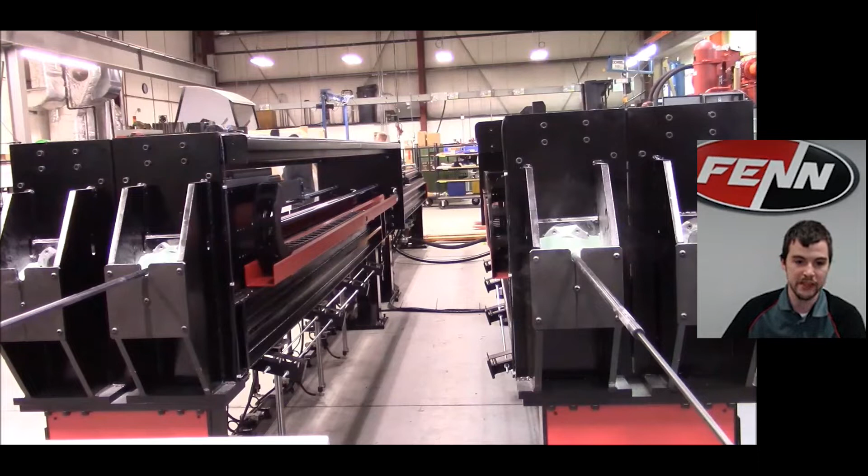What you see here is a video that I'm going to do a quick rundown on, to give you a background on an example of some types of drawbenches we've done in the past. This drawbench itself is a multi-draw drawbench, so it's a little more production oriented, running 4 tubes at once using a mandrel for controlling the ID.

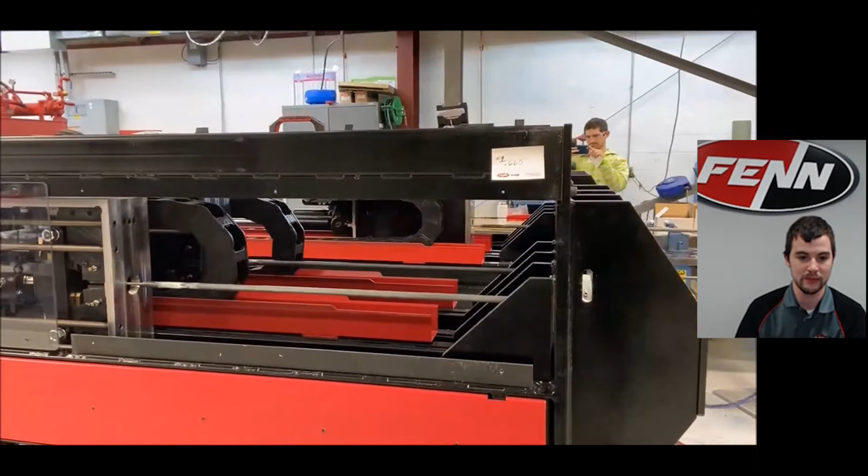We have support lifters that come up to support the material as it's drawn, and then self-release, as you see here on the sides. We'll show this from a few different angles, giving you a better view of the lifters as they come up to support the material. In this process, there's a decent amount of pull force needed, about 24,000 pounds.

We have a hydraulic gripper that clamps down on the material, self-actuates, drives it, and pulls it forward, then self-releases in order to pull it through the die using a cylinder in the back, and self-releases it at the end accordingly. That's just a quick rundown on an example of one type of drawbench we've provided in the past.

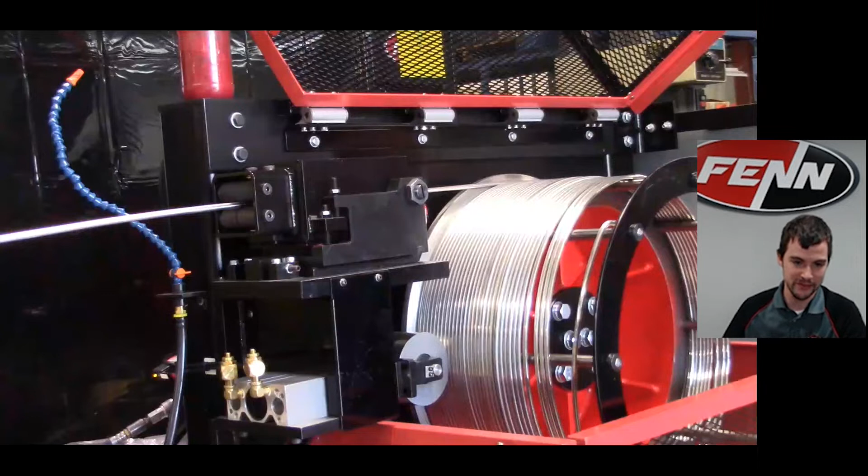This next video is a quick rundown to give you an example of a little more of a simple drawblock, just to show some examples of what we've done in the past. The primary difference, which we'll talk about more regarding drawbenches versus drawblocks, is short length versus much more continuous. Drawblocks themselves are used for running much more continuous length material for higher production purposes.

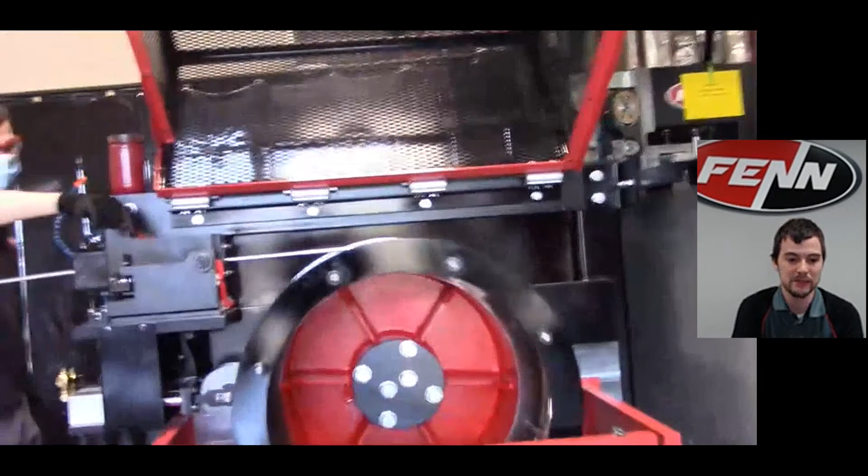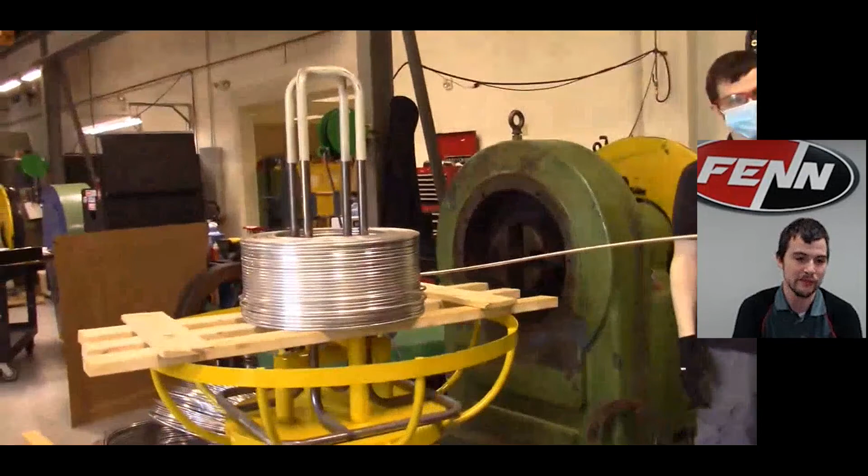This one is running relatively low pull forces, so we used a manual gripper initially for threading, and a pneumatic hold-down roll to apply grip and tension. This does run continuous lubrication, but in this video, when doing tests on the floor, I was manually applying a little of it. We're taking off a brake payoff and running around the drum. Depending on how much is needed to be collected, we will put them in line with other types of equipment, such as dancers and take-ups.

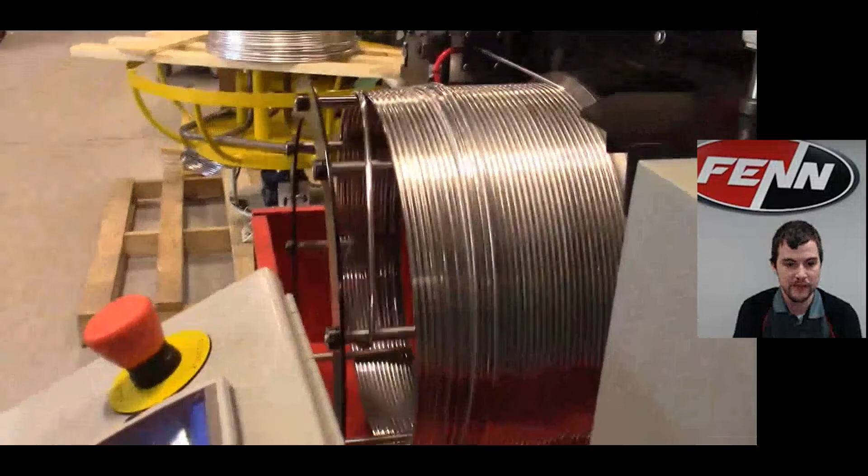In the case of this one, we were running on just a low enough coil quantity that we were running just extension bars for a loose coil shed and collection material, as you see here. Just as a little point of note, you can see a little bit in the bottom corner, a display screen on the control station.

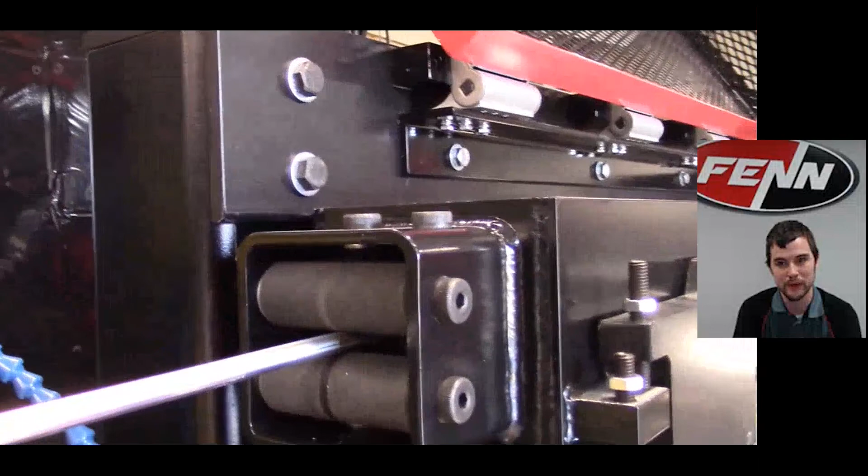That's a display monitoring of the force, because we actually have a load cell tucked into the die box for monitoring the force of the material being pulled through, both from a research standpoint as well as a safety net to protect and make sure the expected forces we're drawing at aren't far beyond that. Because if we see spikes in forces, that means we're getting increased resistance in the die, which we can then stop to protect the system before the material breaks.

So that's just to give you guys a couple quick rundowns of some types of drawing equipment in terms of both the bench and the drawblock side.

So when talking drawing in general, we pretty much work with almost any type of material you can name in almost any type of application. This is just to give you guys a few examples.

So depending on what you're looking to do, we can pretty much accommodate your needs on the material side. This is just to give you some general rundown.

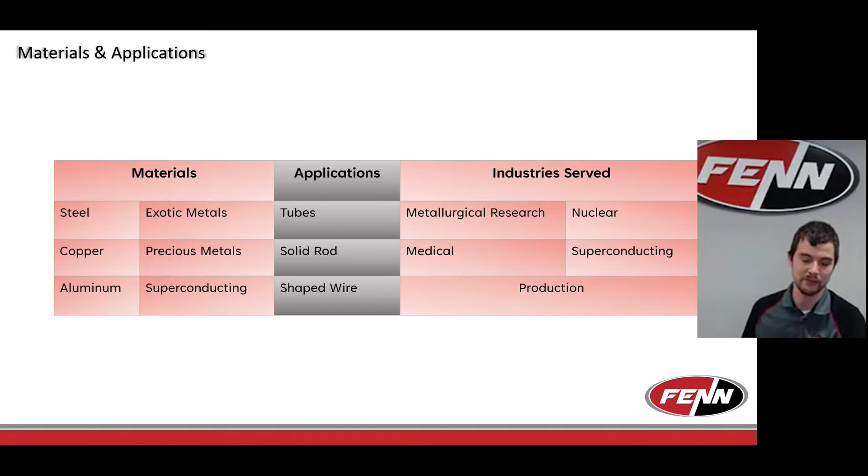So as I mentioned at the beginning, one of the things I was going to talk about is basically what dictates whether you want to go for a rod mill versus a drawbench or a drawblock. The biggest advantage of a rod mill is that you don't need any draw dies.

So if you're using a drawbench or a drawblock, you need a draw die, which means you need to point the material prior to threading it through the die and doing your remaining reduction, which naturally generates scrap. So there's less overall scrap and no pointing required when it comes to a rod mill. Those are the big benefits of doing that on a rod mill.

But some disadvantage of the rod mill is because you're using a V-groove rolling pattern, whether to make your round, your diamond shape, or whatever you're doing in your tube and rod, because it's two rolls in contact, you have more natural flow into the cavities since it's two pieces coming together versus one solid fixed die. So in terms of sharpness on your corners, they're going to be a lot looser, and you sometimes might need to take what we call a two-step hit in order to actually get that concentricity.

So that's usually where the rod mills start to lose their advantages, and that's where the advantages of the drawbench and drawblocks come in. The drawbench and drawblocks are a lot easier for controlling shape and size because they can keep concentricity, or for shapes that aren't just circles, they can naturally get you a lot tighter corner radius for your benefits and needs.

And overall, that's why for a lot of applications you see drawbenches and drawblocks used, but there are a few in particular, depending on what the customer is looking to do, where rolling mills can be used quite effectively. And obviously the nature of a roll versus a draw die will also create a difference from a metallurgical standpoint in terms of work hardening and grain structure.

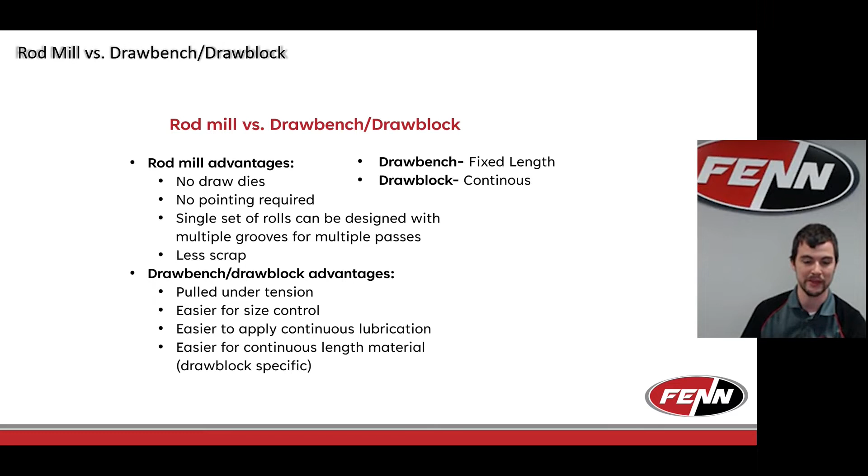It's pretty much what decides whether we go to a drawbench or a drawblock is the premise of fixed length versus continuous. Drawbenches are great for running short length material. Drawblocks are for higher production, or where you have the ability to run a full coil of material. That's when they come into play and are used, much more on the high production end or applications that allow you to run much larger volume at once.

As I mentioned, when it comes to drawbenches and drawblocks, you need to point. There are a few different types of pointing equipment, primarily roll pointers, push pointers, or swagers. We can provide any of those, but we specialize in making a lot of swaging equipment with various tooling, feeds, and features. So primarily, if we're requested to provide a pointing apparatus with one of our benches or drawblocks, we primarily provide swagers unless requested otherwise.

So for those of you also interested in pointing equipment to go with drawing equipment, you can speak to us on the swager front. We've had a separate webinar, and you can find a video rundown on that online.

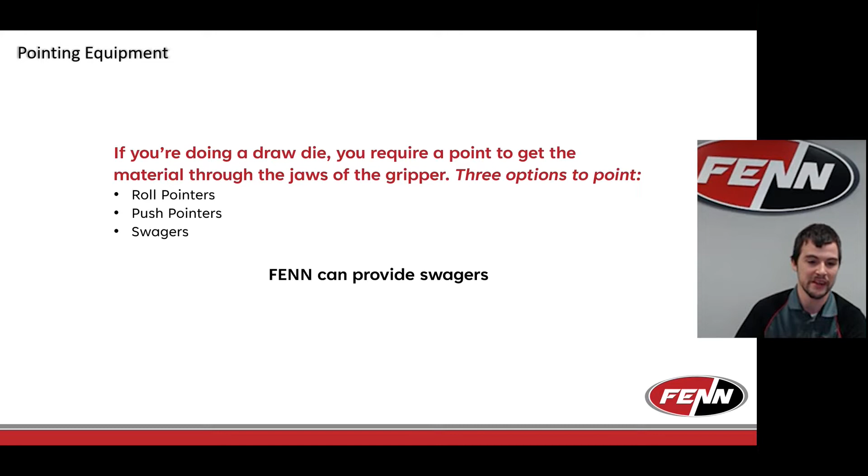So now I've talked about just generally surface level stuff on rod mills versus drawblocks and drawbenches. Now I'm going to give you some background on the rod mills.

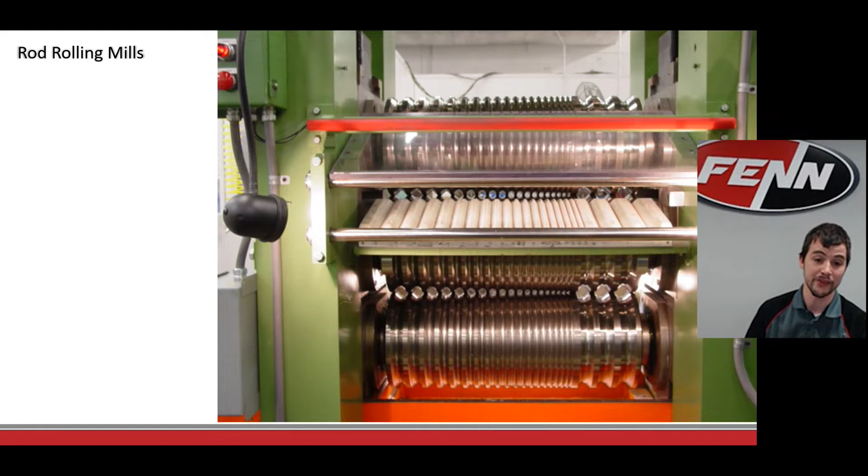The photo you see here is an example of one of the rod mills that we ran. This one was running a diamond shaped pattern in the profiling, and you can see we were running multi-stage hits through the rolls themselves in order to create the reductions over time for the schedule that this customer needed to reach their end application. This one has 3 rollers, which is the 3-high configuration, which we'll talk about on the next slide.

On rod mills, primarily, there are a few exceptions, but primarily when we're talking about rod mills, we're talking about 2-high and 3-high. The reason being, compared to strip and other applications, these are the two configurations that cover almost all, if not all, rod rolling applications for the most part. 2-high is the standard you see for the most part. Both configurations are used for hot and cold rolling.

But the primary benefit of 3-high comes into play if you're trying to get some level of production out of a rod mill, but you're running a fixed length material. With a 2-high mill, you can reverse it back and forth, or attach winding equipment if you have full coils of material to run at a higher production standpoint through a single groove slot and then rethread it through. But if you're running a single bar that you want to pass through and get the most efficiency out of, the 3-high mill by nature allows you to pass it up through the top rolls in one direction and then back through the bottom 2 rolls in the other direction, allowing you to continuously pass it back and forth without stopping and reversing the mill.

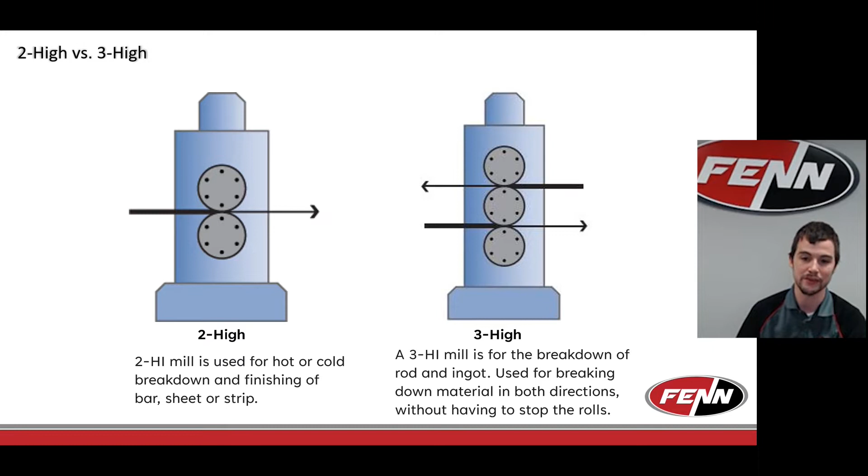Outside of the nature of the two configurations, when it comes to rod mills, primarily the things we look at are the rolls themselves and the frame size in terms of selection. Compared to strip mills, rod mills typically have a much larger roll diameter relative to the housing, because the contact surface is much narrower in overall width since we're dealing with round product that we're reducing. So we can take much heavier hits but need a larger roll to grip it, though it doesn't generate as large a load, so we can usually get away with a smaller bearing.

So when it comes to selecting the roll size, we're usually taking into account the area of reduction and the tensile in order to come up with how much load we're generating, as well as the overall reduction we're taking from the thickness and the sides from a standpoint of contact, and then selecting the roll diameter accordingly.

Basic rule of thumb when it comes to roll diameter is that the bigger the roll diameter, the shallower the angle of entry you have as you're reducing it, which makes it naturally easier for your roll to grip. But a bigger roll by nature needs more raw force to create the same pressure. The smaller you roll in terms of size of material, the more pressure you need naturally in order to get smaller and smaller, which makes it difficult for a bigger roll to produce that.

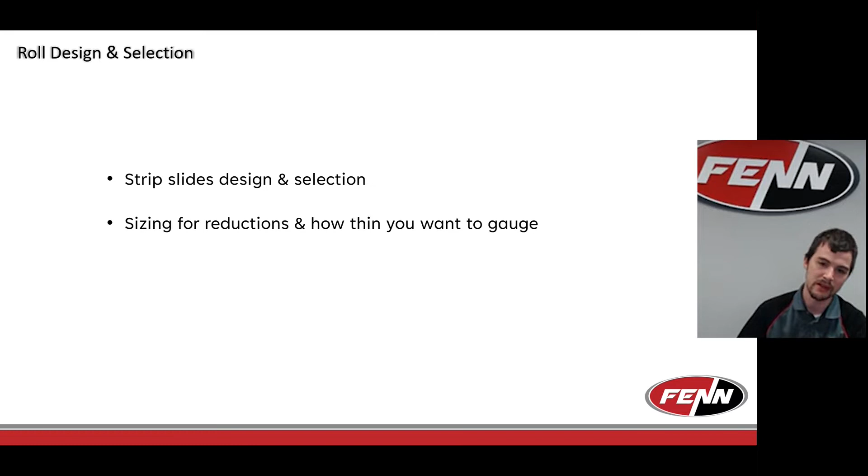So we're now going to talk a little bit more on the drawing side of the equation. For draw benches, we can cover quite a wide range of sizes. We've done benches for very low sizing, about 2-foot draws and 250-pound little pneumatic benches. And we've done benches with hydraulic grippers and chains that can do parts 230 feet long that generated 200,000 pounds, and pretty much everything in between. So when it comes to your drawing applications, we can cover a wide range.

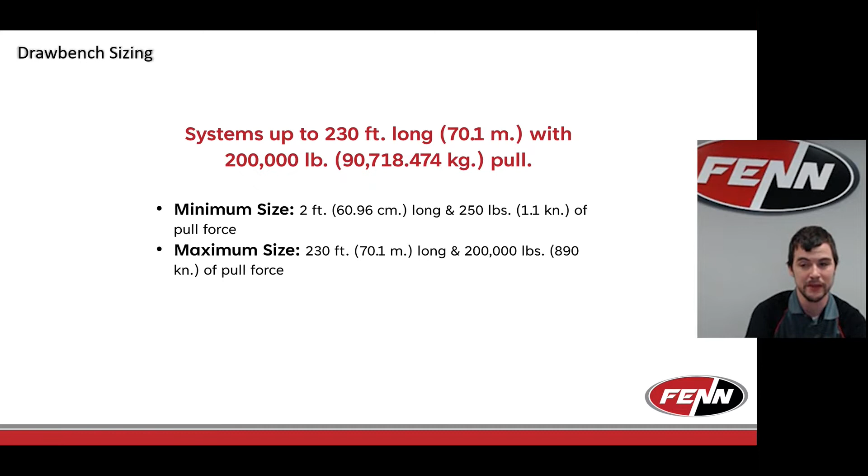And I'd be remiss to say that obviously we're a custom design house. So if you're looking to do something bigger than this, we're not necessarily afraid of doing that. We can definitely go bigger. This is just currently the biggest we've been asked to do upon request.

So when talking that range, there's basically three styles of drawbenches we deal with in terms of the premise of what is drawing it: hydraulic benches, ball screw, and chain. The usual rule of thumb I apply is that if the material is short enough in length that we're not worried about floor space, I primarily default to a hydraulic drawbench. The reason why is that the point that's gripping it and moving back and forth laterally to pull the material in a line is a cylinder directly in line with the material. So it's a perfect straight line draw.

You can control the pressure. It's great for controlling your tension. It's very simple, it's clean, and it's great to work with. The downside to a hydraulic drawbench is the overall footprint it takes is about double the length that a chain or a ball screw is going to take, because you need your draw length plus the length of the cylinder itself.

So if you have a 5-foot draw, you have a 5-foot draw area plus a 5-foot cylinder and the miscellaneous stuff around it, so you probably have more about a 12-foot space, which for a 5-foot draw is fine. If you have a 100-foot draw, you probably don't want to use a cylinder for that exact purpose.

You're going to be more likely using a ball screw or a chain. Ball screw and chain both work on the same basic premise: we have a motor and a gearbox driving either a chain or a ball screw that moves a carriage block up and down the track, which naturally pulls it. The ball screw or chain is underneath the carriage itself, and underneath the material from a point of draw.

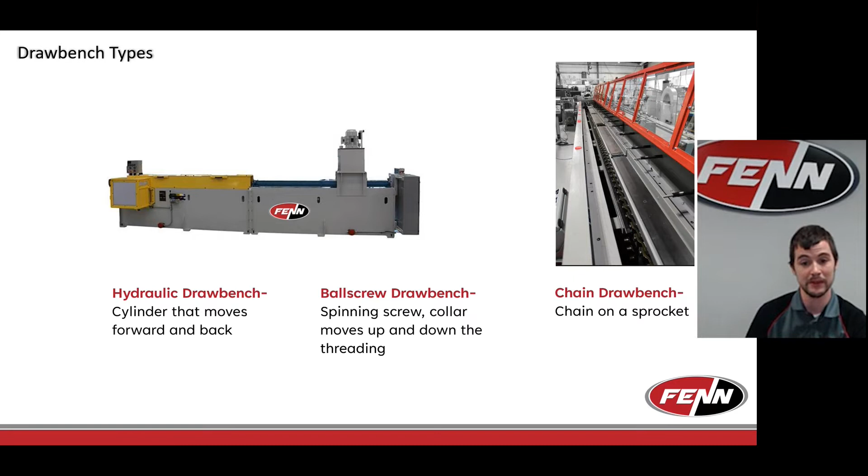In terms of what's driving the draw mechanism, there are obviously other components at play when it comes to selecting the drawbench, such as the grippers, which we'll be moving into next.

So in talking about gripper types, there are three types of grippers: manual, hydraulic, and pneumatic for the most part. Hydraulic and pneumatic work on the very same premise—it's a cylinder expanding a set of jaws onto the material to clamp it. The one you see in the photo above can function as either a hydraulic or a pneumatic gripper; that one happens to be a hydraulic one for reference, versus a manual, which is obviously a self-closing gripper jaw.

Rule of thumb is, if the forces are low enough, we use a manual gripper. It's simpler, cleaner, you don't have to run piping, and it's lower cost. Once the forces are high enough that we're worried about the material slipping the jaws, or the ability to get the jaws off the material once you've done a draw, we then shift to a hydraulic or pneumatic gripper.

More often than not, you'll see it being hydraulic for basically two reasons. Pneumatic covers a range that's too much for a manual gripper to handle, but not so high in grip force that you need a lot of pressure relative to the size of your gripper cylinder. So it's usually working in a limited field.

The other reason is that when it comes to a hydraulic gripper, if you're already using a hydraulic cylinder, for example on your draw stroke, I'm just going to use a hydraulic gripper cylinder if I need something hydraulic or pneumatic at that point, because I'm already tapping into a hydraulic power source and line. So most often you see that once you get beyond the forces where you can get away with a manual gripper, you'll see a hydraulic gripper.

Like the style you see there, it's most likely going to be hydraulic. With the hydraulic gripper, you can adjust and control your clamping force based on your pressure, balancing gripping the material versus over-marking it. So you'll have the ability to make adjustments accordingly, and depending on the level of precision and controls, we can have that done either manually or completely through an electronic control system.

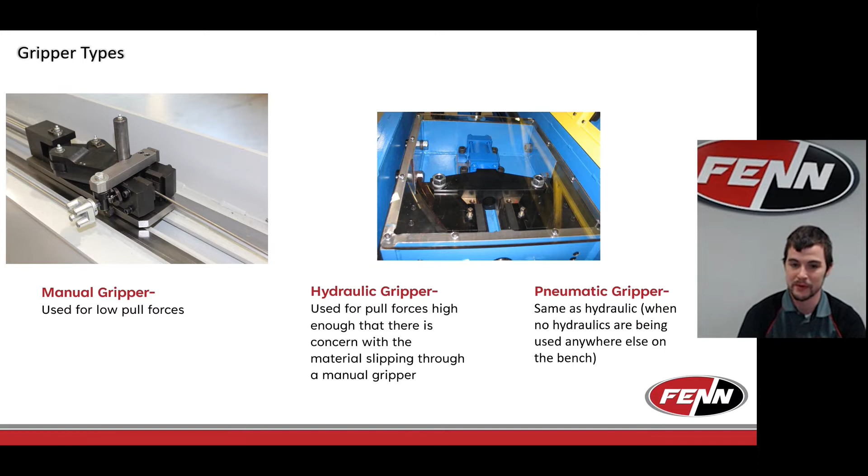So some other common features you'll see on both drawbenches and drawblocks—I'd say pretty much universally on every draw block and the vast majority of draw benches—is lubrication. The nature of drawing material through a die generates a large friction contact. There are rod mills where some customers will use lubrication as well, but it's not as common, just by the nature of having a rolling contact surface versus drawing something through sliding friction.

Sliding friction generates a lot more natural heat. Too much heat causes thermal expansion of the material in the die, which binds up, creates cracking, and gives you a high chance of breaking. So very commonly, lubrication is used to lower the coefficient of friction going through the die so it slides through more naturally, as well as acting as a coolant reservoir to take away some of the heat. Lubrication is extremely common in drawing just by the nature of the process.

When it comes to applications, we can do wet drawing, running a continuous type of water soluble oil or other lubricants through a recirculating system, or complete dry drawing, such as a powder or other solid lubricants, depending on customer needs.

What lubricant you run is 100% indicative of the material, what you're doing to it, your reduction, your process, your speeds - all those factors.

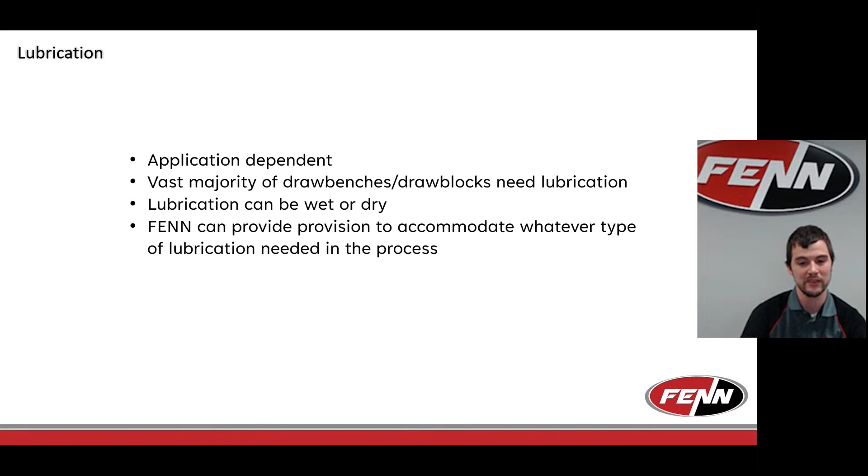Outside of what I just mentioned, there's other equipment we can provide with draw benches. The standard ones we went over briefly were grippers - manual, hydraulic, or pneumatic - with interchangeable tooling to accommodate different wire, rod, and tube sizes. I also talked about lubrication in terms of dry and wet, but there are other features we can provide that are a bit more upon request - some more common, some less common.

One of the things I showed in a video earlier was the idea of a multi-draw draw bench, so we can draw multiple bars at once programmatically, or we could do a simple single draw like you saw in some of the photographs.

When it comes to die boxes, depending on what's needed, we can do various things in terms of movement and adjustments to give a little more precision to accommodate customer needs. That's seen in draw benches, and you'd see it much more often in draw blocks, but you can see it in both - as well as in applications making more rectangular or square-shaped material, where you're not as concerned about your corner radius, and for metallurgical reasons you want to use roll contact.

Customers will mount a Turk's head instead of a draw die in front of a draw bench, and pull it through, which basically eliminates the need for pointing and serves as another method of reducing. So we can also, for some specific applications, mount a Turk's head in front of a draw bench.

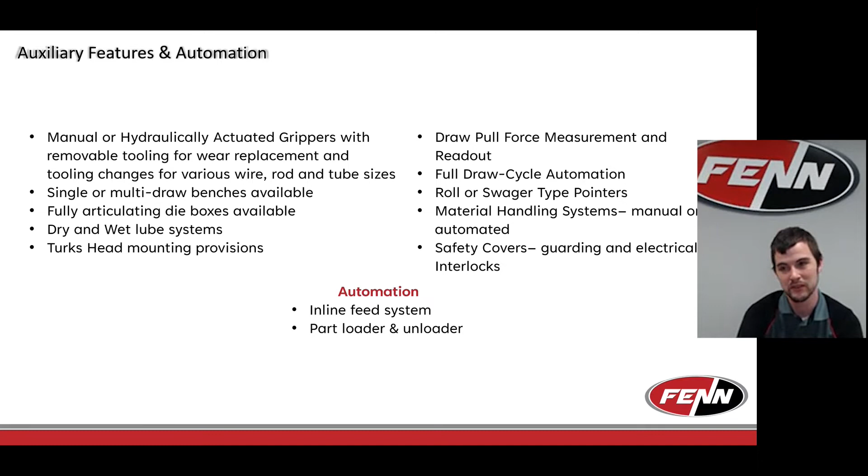Now we'll move to our Drawblocks, the final thing we'll be talking about. Drawblocks are used once you get to a point where you have a large enough length of material that making a bench to accommodate it on your floor is illogical, and you can instead run it comfortably bent around a drum for a much higher production and efficiency standpoint. So drawblocks come into play when your wire or rod size and length can accommodate the ability to run at a higher production rate.

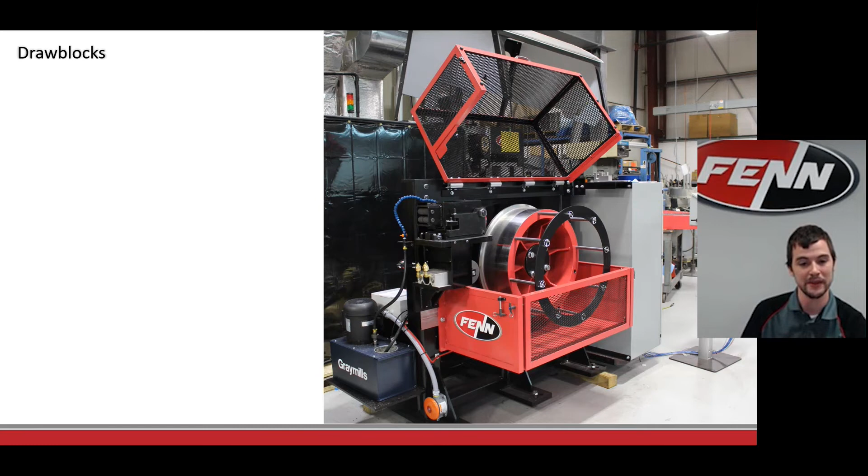Similar to benches and rod mills, sizing is everything. With drawblocks, your sizing is 100% based on the diameter of your drum, as well as the force needed to reduce. When talking about winding tension, starting with round material as a simpler example, in both round and flat material cases, your winding tension is directly correlated with the radius it's being bent around. A smaller drum naturally generates much higher tension. Depending on how large and stiff your material is, it will have a certain resistance to bending, so we have to select a diameter large enough to bend it cleanly, without being so large that it's overkill and leads to a much higher cost drum to spin.

For very small, delicate wire, we've wrapped them around 12-inch drums. For much heavier duty applications, we've had drums that are 70 to 80 inches in diameter. It all depends on how big and stiff your material is, in order to create an appropriate radius to bend it around.

To give some background from an equation standpoint, generally when wrapping a round wire around a drum, your tension is roughly your tensile strength times pi over 32, times the radius of your material cubed, over the radius of your drum. That's a quick way to estimate your expected tension. This is why, as I said, if you double the radius of your drum, you cut your natural tension to bend it around in half. So that's very critical in terms of your drum size selection.

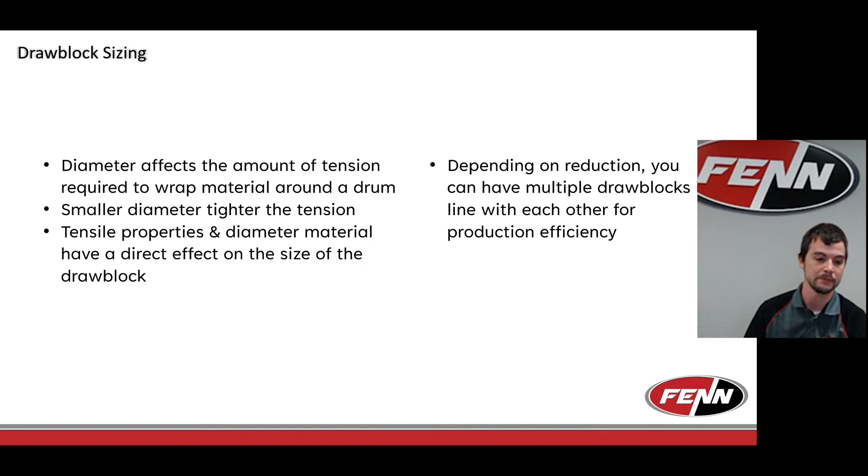Similar to Drawbenches, Drawblocks come with a type of gripper, but the grippers work a little bit differently. With Drawbenches, the gripper is holding it the entire way through the process. With Drawblocks, we have a gripper that's used for the first maybe roughly 3 to 7 wraps, just enough that you get enough wraps for tension around the block, that we can then apply a roller to grip the material and hold it in place, at which point the gripper releases.

So the grippers, similar to the Drawbenches, are based on the concept of how much force is required. If the forces aren't too high, we'll use a manual with chain. The cost is lower, and especially on a drawblock compared to a drawbench, they keep it a lot simpler. Manual chain is just a simple thread, set up, grab, and then you manually release the jaw and take the chain off once you've got your wraps and your tension roll during threading, and you continue on your way.

Once your forces get beyond that, to the point where you need something with a little more force than a manual gripper, we then talk about hydraulic and pneumatic, where hydraulic is a little more common, on the same premise that once you get beyond a force limit, hydraulic just becomes a standard. The way these work is that the gripper is built into the drum itself, so the jaws actuate out through a cylinder and grip on the material. We do a handful of wraps, then engage the hold down roll, and the gripper self releases. That's why I say it adds a lot of complexity, because we're piping and designing a gripper mechanism and everything that actuates in and out inside the cavity of the drum itself, so that once the gripper is released, it's out of the way for the material to continue to shed on the drum.

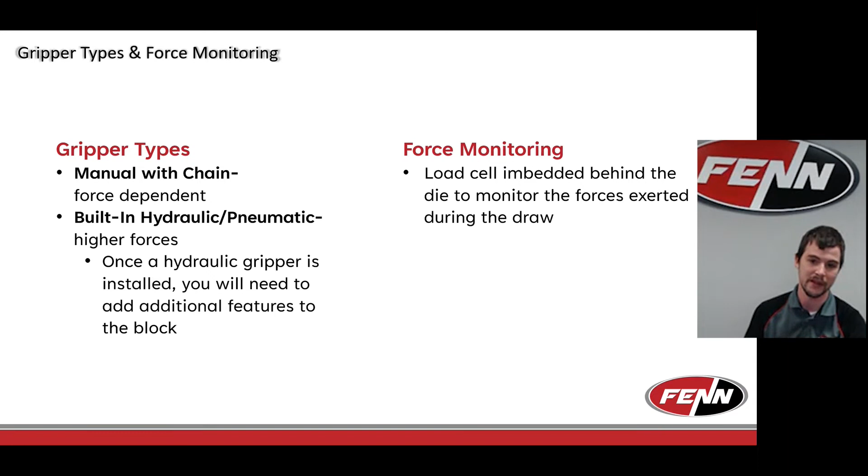Most of you that submitted questions ahead of time, I tried to cut some of the details out just for protection. If you want to go into details, we can talk now or more privately. The questions were related to different types of materials and applications.

One of you asked about nickel titanium, which we can definitely provide from a linear drawing standpoint. With nickel titanium, due to them being much higher tensile materials, we usually expect a lot larger force relative to diameter. So by default I'm usually using hydraulic grippers along with some type of lubrication, some dry, some wet, depending on the customer process. We can definitely provide those with a certain level of automation as well.

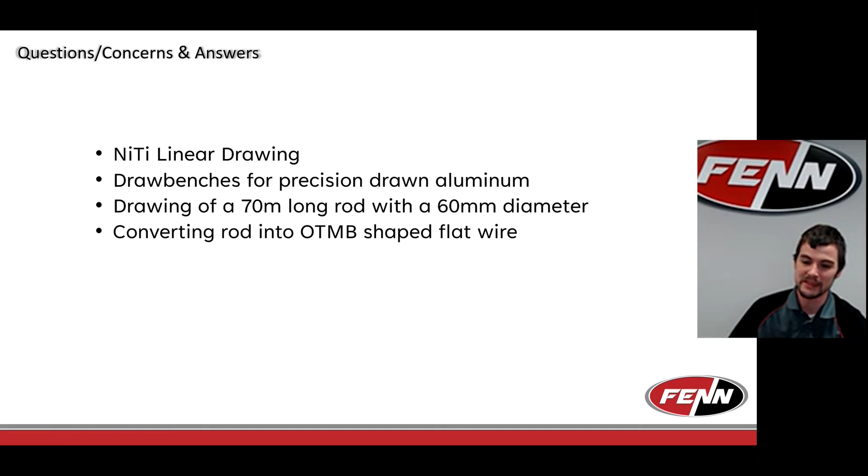So that's just answering a few of the questions people had up front. There's some in the chat box, but I'm going to now stop sharing screen to go to the ones in the chat box.

One of you asked about experience drawing 6000 series aluminum. Yeah, we've drawn 6000 series aluminum. I would not say that we've drawn it to a level of any type of specialization, but in terms of aluminum, yeah, I've drawn your standards, I've drawn 6000 series, basically in terms of your alloys in general. For the most part, if you name it within reason, we've at least dabbled in it, because that's what we are - we are a jack of all trades and material. So I've worked with pretty much every grade of, for the most part, aluminum and steel you can mention on the basic ones, as well as then get into much more of the atypical alloys.

Obviously it's nitinols, and that was brought up by one customer, but we also do stuff for those of you - this would definitely be more of a privacy talk, and we won't name customers - that deal with stuff more on the energy side with radioactive material and things like that, we also dabble in. So if you have questions on have we worked with that in the past, yes, and depending on what you want to do, we can definitely talk more in detail about your application to see if that's something where we can assist you.

Anthony, you asked for the draw blocks - can a take-up reel diameter be changed out to accommodate for a range of wire diameter? So if you're talking about changing your ID, within reason, yes. A lot of times, if you're collecting on a spool and your ID range isn't too large, we can run a single shaft that works with any bore, and would just have to have maybe an auxiliary tool to accommodate if your spool bore changes.

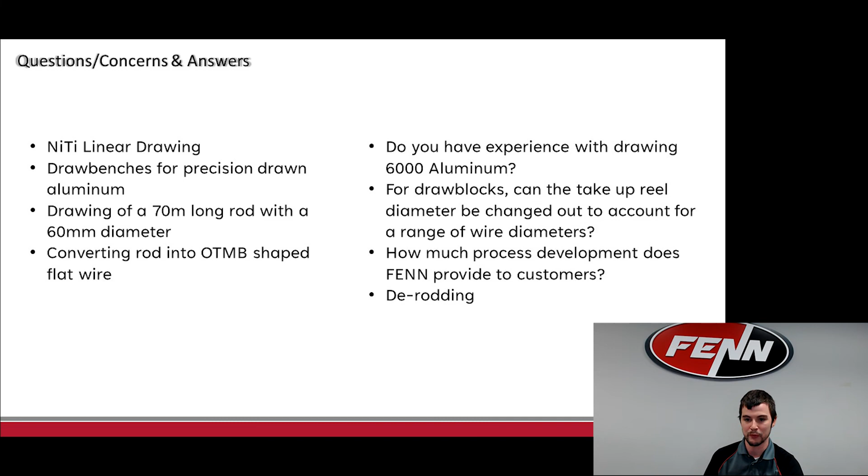Yeah Mark, we've enabled that if you want to unmute, you can talk. Yeah, there we go. Okay, now it's letting me unmute.

All right, so quick question. You mentioned that on your precision tubing, you work under a thou kind of number. Is that a function of the ratio of it, or is that a function of the diameter? I guess that's the question, right?

When I was talking about that, I was talking about tolerance on the diameter. So I've done tenths of thou for tolerance on your OD, and for ODs I've done stuff that's only a handful of thou in diameter for products that are very light and delicate on the medical side in terms of overall OD. When it comes to that level of tolerance accuracy, a lot of it's dependent on the draw die as well as lubrication, and then the final thing is obviously on the material side.

Rule of thumb in general, when talking about metal forming or metal reducing, the quality you put in correlates to the quality you get out. A simpler way to phrase that in a bit more technical way - roughly speaking, usually you improve tolerance by about 50%. With rolling equipment versus drawing equipment, you usually can do a little bit better than that, but there's still a percent limitation.

So for customers of mine, more commonly on the medical and precious metal side, they'll say, hey, I want plus or minus 0.0001 inches on my diameter for control, for example. I'm going to advise them, well, your diameter going in has to be pretty tight as well. You can't give me material that has a 3 or 4 thou variation in diameter and expect any single draw die to get that tolerance. But if you start with that level of tolerance, I could, over multiple draw dies, slowly improve it to get to that level.

So obviously one of you asked about derodding, so yeah, I can probably provide a little more information on derodding.

Yeah, that's another feature that can be provided. Depending on the application, some customers will have derodders that they buy separately from us, but oftentimes we'll do derodders as what we refer to as an attachment onto a drawbench. So we'll add a secondary vice grip that holds the material in place while we pull the mandrel out of the die, or the rod out of the tube, and then have some catchments for when it comes out, for the energy release.

So we usually provide those as attachments to our bench, but depending on some customers and their level of production needs, they might buy more commercial derodders on the side. But if you're interested in derodding, depending on what you're looking to do, we can definitely assist you on that.